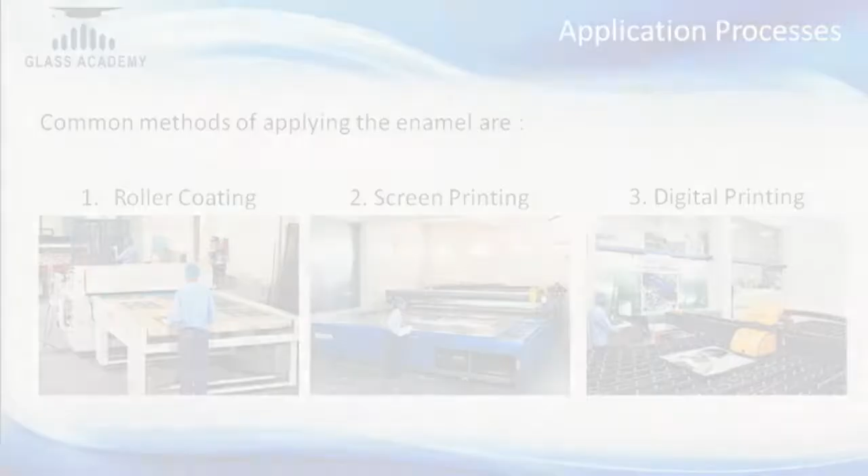So now we come to the application process. We have covered three: one is the roller coating or roller printing, the other is screen printing, and the third is digital print. Before we go on to how we apply these inks onto the glass, there are certain things that need to be taken care of.

The ink storage needs to be between 20 to 30 degrees, which in India, a warm climate, the temperatures may go up to 45, is a problem. Temperature above 35 will start to deteriorate the ink.

The pigment will start to settle down in the ink basket, and you'll see a medium deposit on top of the ink layer, resulting in inconsistent printing. So we need to store inks in a cool and dry place, that means even refrigeration or maintaining a temperature between, if not 20 to 30, a little bit more, maybe a couple of degrees, no more. It is essential, otherwise you'll not get consistent results.

The printing areas where the print has to be done has to be as dust free as possible. I've seen certain print areas which are completely dust free, because the deposition of this dust on the glass surface or on top of the ink will later lead to pinholes and defects when the glass is tempered or fired.

The substrate, the glass, has to be very clean. A lot of the time there are salt deposits which are not visible to the naked eye if the glass is not cleaned well. When we print it and the firing of the glass happens, these watermarks or salt deposits become visible. At that time, you may have lost a lot of glass with no way to repair it. So it's best to clean the glass well before we start to print.

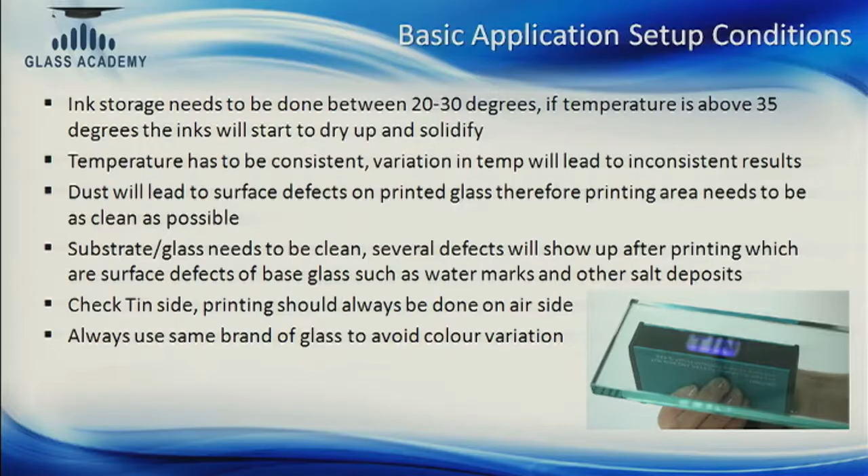The other essential is checking the tin side. When you're using float glass, there are two sides: one side is the air side, and one is the side floating on the tin bath. Tin is a metal.

Some of the inks don't react too well with tin, so it's essential to print on the air side, and all the glasses have to be printed on the air side. Otherwise, you'll get a color variation, or you might get something called a bloom or a color difference in the print.

Other than that, always use the same glass. I know there are many brands of glass available, so it doesn't matter which one you use, just use the same glass, because there will be a color variation due to the tint of the glass. Also ensure it is from the same furnace - if a glass manufacturer has 3 furnaces, make sure it's coming from the same one. You don't want a color variation due to this.

So these are certain preconditions before we start to print the glass. The next process is roller printing.

A roller printing line is essentially a washing section which will wash the glass to clean it properly, and then there will be something known as a roller printer, which will apply a solid coat of a single color on the glass. Then there would be a drying section which will dry the ink, and you will get a uniform coat of any color that you are printing on the glass with an even deposition of ink.

This deposition of ink can be controlled. The drying section is quite long at times, depending on the speed of the line. So if the speed of the line is 7 meters per minute, which is quite fast, you will need the glass to be dried off before we take it off the line.

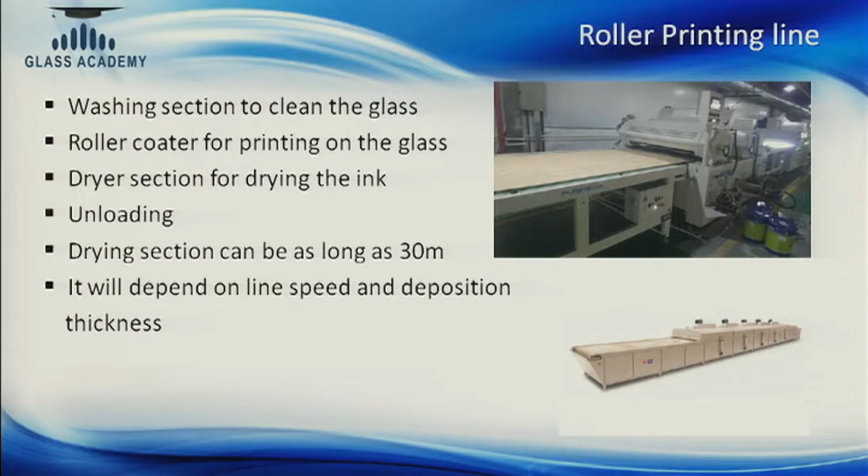So that would mean that the line would be designed according to the speed of the roller printer, and it does take a little bit of space. The line speed and the thickness of the deposition of ink will determine the size of the drying section. So what is a roller coater?

A roller coater is essentially a rubber roller, which will - it may be steel as well, but in case of glass, normally we use a rubber roller - transfer the ink onto the glass surface. Normally, in this kind of roller, a single color is deposited.

The rubber rollers, as I explained, have grooves, and the grooves will carry the ink, which on contact with the glass will deposit the ink onto the glass surface. There is also a steel roller which attaches itself to the rubber roller and controls the amount of ink that's going through, and a scraper will clean the roller as the ink goes through.

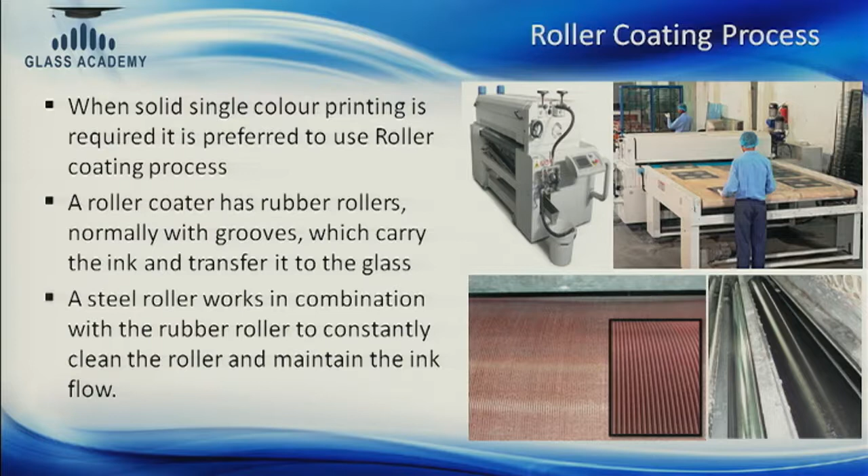There can be certain rollers which have certain patterns as well - like in the image, you can see certain patterns on the roller. So you can also have patterned glass through this roller coating process, and you can transfer this pattern onto the glass. The same roller coating process can also be used for organic inks such as lacquers, and is commonly used for that application as well.

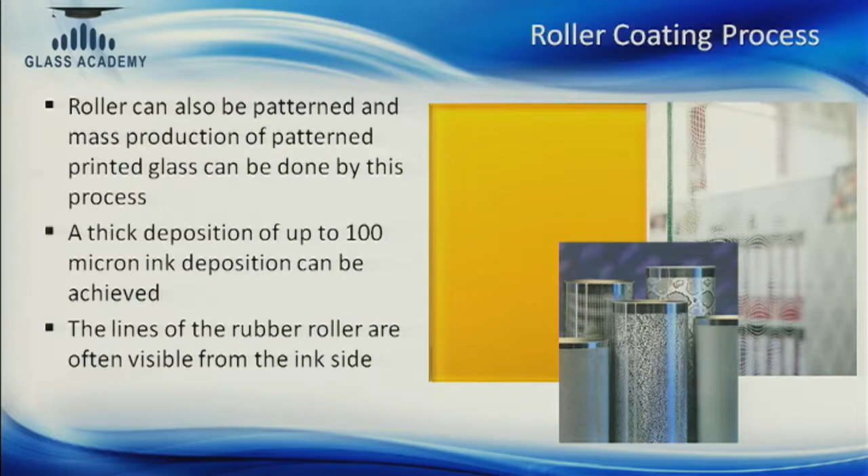The rollers have grooves that can be customized - there can be more grooves or less grooves, as shown in the image. A 20 lines per inch groove would give a higher opacity of print, and a 55 lines per inch will give a lower opacity of ink.

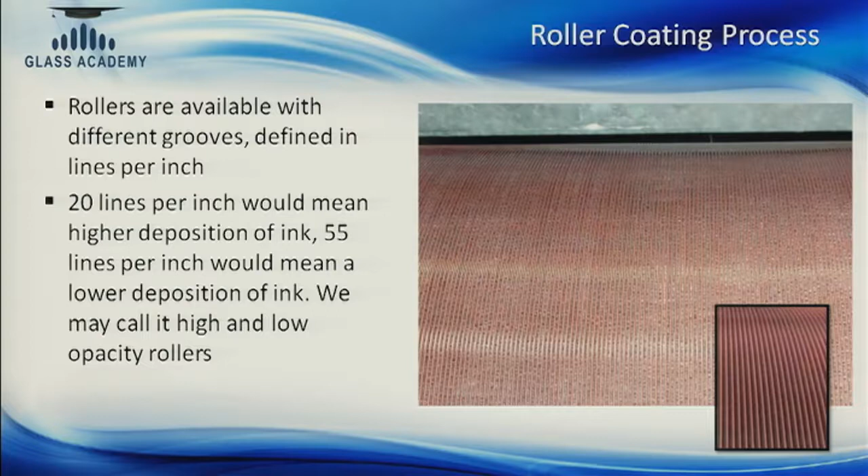The maximum that you normally print is 100 microns, which is what we call a high opacity print. Any more and you will start having problems during the firing process. 40 to 50 microns would be the lower end on the low opacity ink deposition.

It depends on the application on which the glass is going. For example, if it is going on wall cladding, you need a high opacity print, a 100 micron deposition, and with certain lighter colors, even that 100 micron deposition may not be sufficient. So you have to choose the right ink with the right pigmentation, and in certain applications organic inks are better where they are more opaque.

The use of ceramic ink for wall cladding is where it can resist UV, where light is coming onto the glass, or when it needs to be tempered. In certain applications the glass will break and you need the glass to be tempered, and there you need to use a ceramic frit.

Rollers use water soluble inks. If you use solvent based inks, it is far too expensive to clean the rollers. Every time you are finished with a color, you need to clean the rollers with water. So water soluble ink is easy to clean - it will come off the grooves with a simple jet of water, and it is environmental friendly. It's a much easier way of processing.

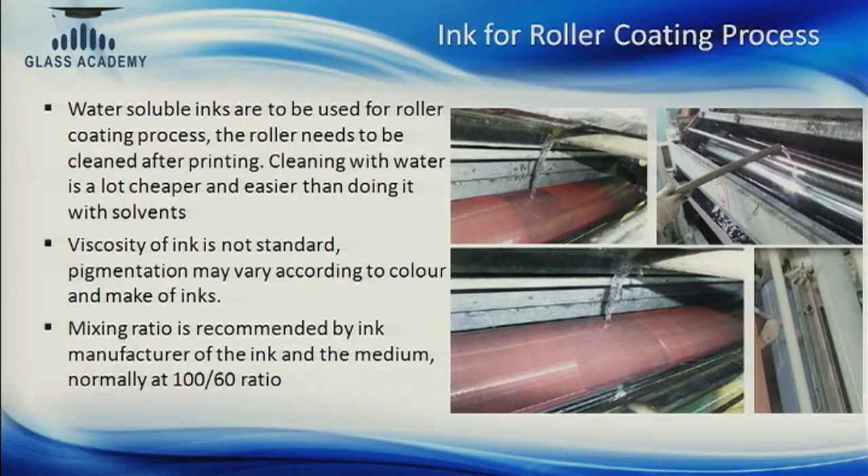Viscosity of ink will depend on the pigmentation of the ink and the color which you are printing. The darker colors may require less viscosity, others may require more. The mixing ratio normally is 100 to 60 - that means when you get the ink, you have to add a certain amount of medium to the ink, and then you measure it. What is the viscosity?

How do you measure the viscosity? You can use a viscometer - a popular brand is the Brookfields viscometer, which will give you how thick the ink is. Or you can use a very simple method known as the Ford cup, where you put an amount of ink in the Ford cup and let it drain, and see how much time it takes for the ink to drain. Based on that you can measure whether it is 80 seconds or 100 seconds. Normally an 80 to 100 second ink is sufficient for roller coating.

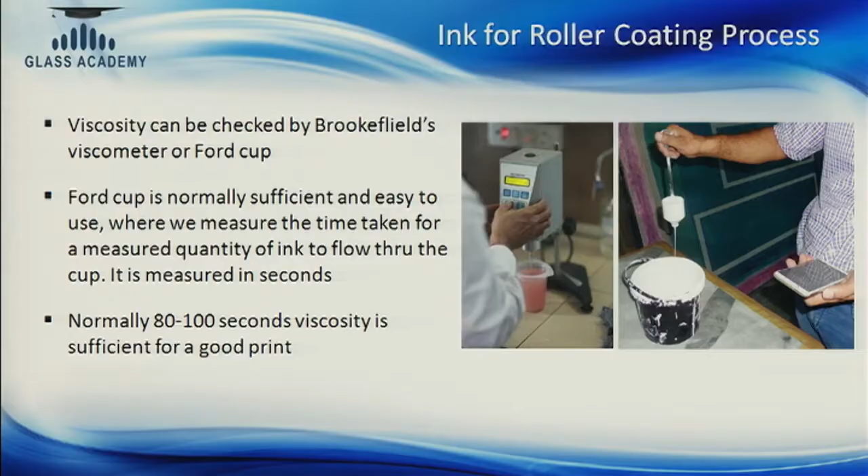In certain applications with lighter colors, if the pigmentation is lesser, you may need to go for higher viscosity, which means if you go to 200 seconds, the ink is thicker, and the deposition will be the same, but the ink viscosity will be more. This is essential for determining the opacity of the print, which is essential in roller coating, and it will also determine how the ink is rolled onto the coater, and this will determine how it is then passed on to the glass substrate.

For applications such as these where it is going on a wall, we recommend that you use a high opacity roller, go for a 100 micron deposition, and a viscosity of around 80 to 100, although parameters vary according to the inks that you use. You can have a nice and even print where you cannot see the silicone while it is being pasted, which is the essential requirement for this process.

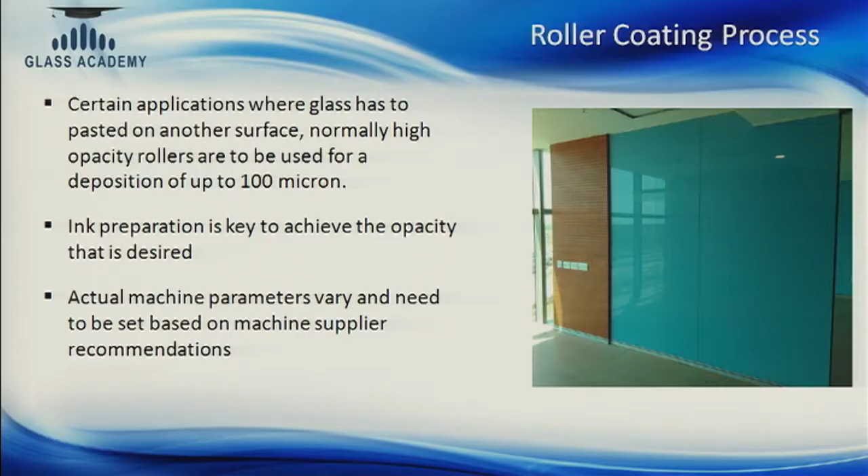As soon as you print the ink, it has to be dried, because you are doing a thick deposition of ink. Dust will come and settle on the glass, and dust, when it settles on the glass or on the ink, it will show up when you fire the glass in the furnace. So you need to dry it off as quickly as possible.

The other reason is that it takes a long time for the ink to dry, so when you unload the glass off the machine, there is a chance that the frit gets damaged. The sooner it gets dried off, the better adhesion it will have on the glass, and the lesser chances it has to deteriorate while handling.

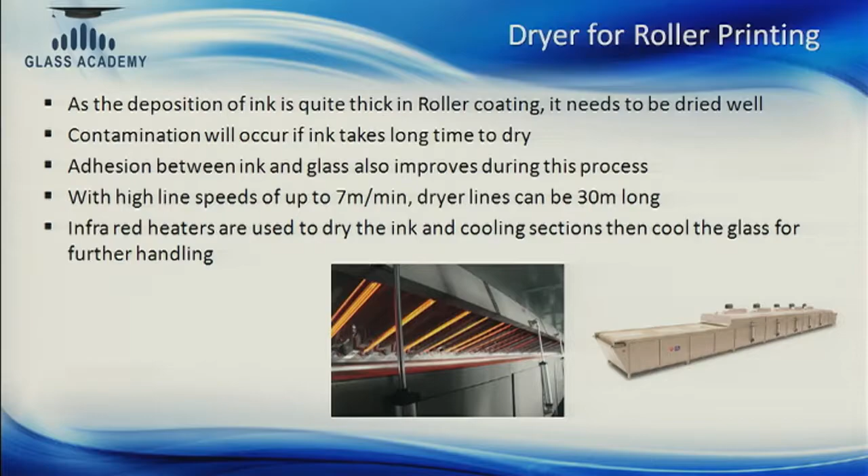Normally the dryers that are used use infrared heating, and you also heat the glass and then you cool it. It is essential to cool it to be able to handle it, and if you just heat it and let it be, then there can be other problems as well.

The line speed can be controlled, and essentially the fastest you can go is 7 to 8 meters. So the drying length would be determined accordingly - you can have more heating sections or more cooling sections depending on the type of glass that you print. There are certain applications, glass shelves, spandrel panels, which may require low opacity prints, and there you may not require a very long dryer if the ink deposition is lesser.